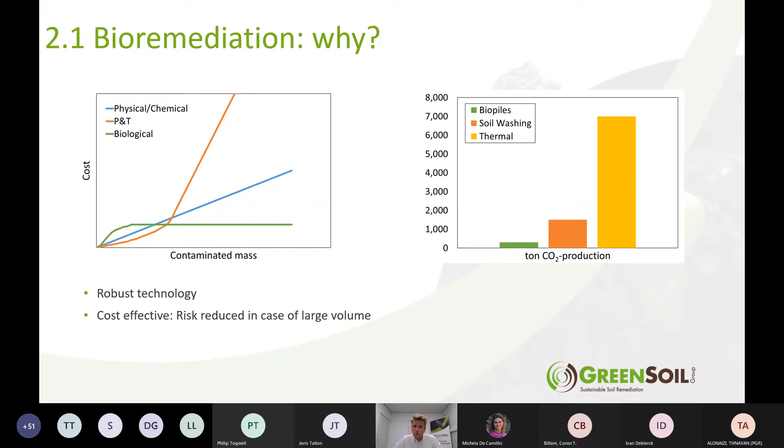Moving to the next slide, what is bioremediation? I think we have several ways of explaining this. If you look at the more chemical approach, we can have several pathways that we distinguish: aerobic degradation or anaerobic degradation. The way I try to explain it when people ask me what my job is, we are dealing with contaminants and stimulating the biological degradation, which can happen in two ways, aerobically or anaerobically.

When the aerobic pathway is taking place, microorganisms break down the contaminants, respiring oxygen just as we do, producing carbon dioxide, energy, and biomass. In the anaerobic pathway, it's the other way around: those organisms are not breathing oxygen, but breathing the contaminants. The electron acceptor is the contaminant, and the electron donor is the organic substrate we usually inject, such as molasses, lactate, or our own Dehalo GS. The products formed are ethene, ethane, carbon dioxide, energy, and biomass. This biomass is quite important, because the more biomass we generate, the more microorganisms we form, and the more we accelerate the biodegradation process.

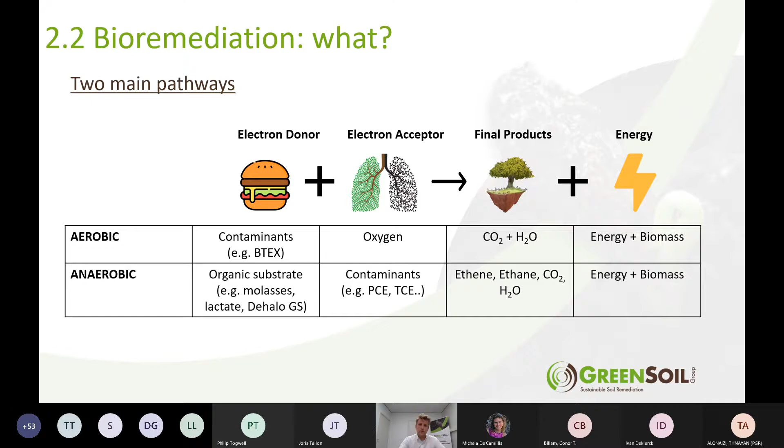So the focus on this biomass is quite important. If we look at aerobic bioremediation, we are usually looking at compounds such as hydrocarbons, mineral oils, low chlorinated compounds, alcohol, ethers, and so on.

These products often have a density lower than 1 and have the tendency to float above the groundwater table, forming L-NAPLs. With changes in the groundwater table, you get a typical smear zone—a layer surrounding the groundwater, due to natural fluctuations of the groundwater table, where you have a dense contaminated mass present.

As a rule of thumb for the degradation process, as we said earlier, you need the biomass, and you need oxygen as well as nutrients, which are required for forming the biomass. But often oxygen is a limiting factor here. We use the rule of thumb that we require about 2 grams of oxygen for each gram of oil that needs to be broken down. That also provides some rules of thumb on how to assess how much oxygen one would need to biodegrade a certain contaminant.

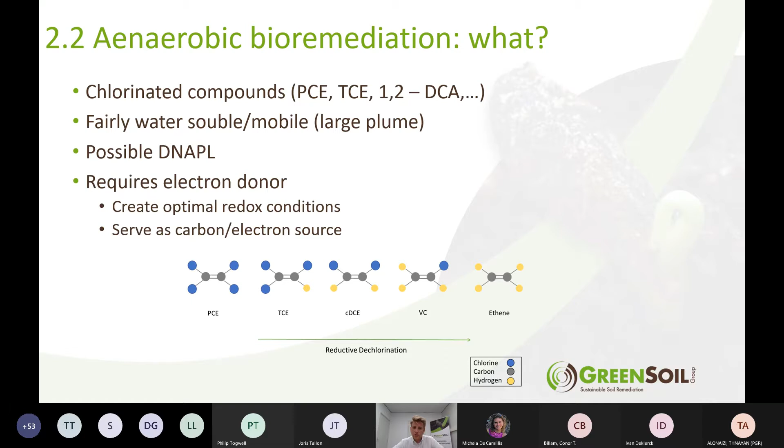To make sure that the degradation of these parameters can take place, we need to create the optimal redox conditions, and one needs to dose the electron donor, which serves as a carbon and electron source. One of the most typical and most known pathways, the reductive dechlorination, is presented in this simple graph below, where you see the elimination of one chlorine atom at each step.

However, in reality, bioremediation is much more complex than we often consider. We usually have different processes taking place at the same time due to heterogeneity. These heterogeneities can be related to conditions, for instance different soil layers, but also heterogeneity related to the contamination. Often we don't know for sure what is really going on—we usually observe some concentrations of contaminant mass, also the daughter products, also some of the other geochemical conditions, and in most cases there will be a combination of biological and non-biological processes taking place.

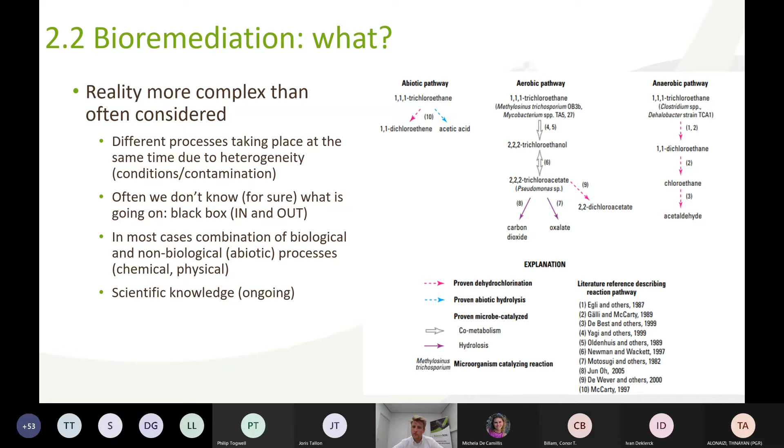Then you have an aerobic pathway where you can have just regular degradation, could also be a co-metabolic degradation, and then you could have an anaerobic pathway. In reality, all these different pathways are taking place by different microorganisms under different geochemical conditions. What you really want to do is see which pathway to stimulate, which is the most effective, which will have the fastest results, the fastest degradation, and try to create the optimal conditions for this pathway. That's more or less where the science kicks in, and how we try to see what the possibilities are and how we do this.

I call it here the GreenSoil approach, but I think everybody looking at bioremediation more or less has the same approach. The first phase I like to call the assessment. In the first line of evidence, we try to see whether we are already observing some degradation. A quite easy example is contamination with perchloroethylene. If you know this is the mother product, you take samples and observe whether we already have presence of trichloroethylene, dichloroethylene, vinyl chloride, ethene, and so on. If that's the case, then you know degradation is going on. How can we accelerate this? How can we stimulate this? And how can we make sure we achieve the target results?

If we are not observing this degradation, it could have several reasons. The most often second line of evidence involves verifying the possibilities by checking the geochemical boundary conditions. These are also quite well known: checking pH, checking redox, checking the presence of oxygen, nitrate, sulfate concentrations, TOC, DOC. These are all typical parameters which can point you in the right direction as to why degradation may not yet be taking place.

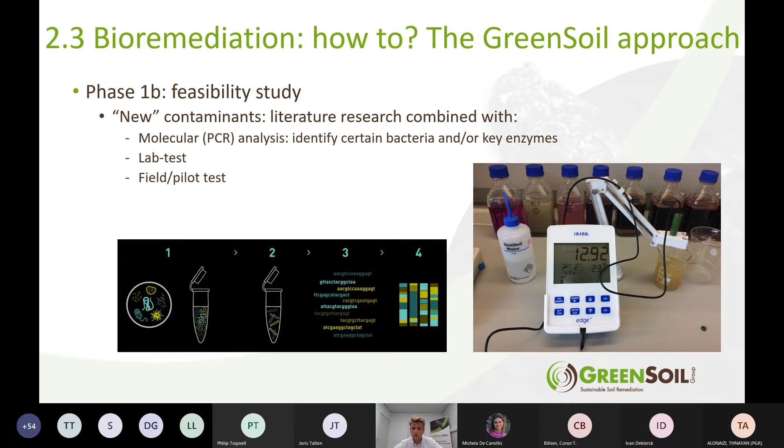Once phase 1 is completed and we expect biodegradation is a possibility, we move to the design phase of the project. One thing we cannot stress enough is that a thorough understanding of the conceptual site model is key. It's key when you're investigating or delineating contamination, when identifying risks related to contamination, but it's also key when designing a remediation system. So you need a thorough understanding of the contamination, the geology, the hydrogeology, and the geochemical boundary conditions, as I explained earlier on.

You also need to know what are the boundary conditions which are being imposed by the redevelopment, by the stakeholders, and timing-wise. Then based on this information, you are able to select a remediation technique, or in case of remediation combined with redevelopment, often a combination of techniques. Once you have selected your technique, you will be filling it out and going into a detailed design.

Things that we often see is, for instance, a combination of an excavation of source areas together with an in situ approach, or for instance, a combination of pump and treat and soil vapor extraction for smear zones, followed by an in situ approach.

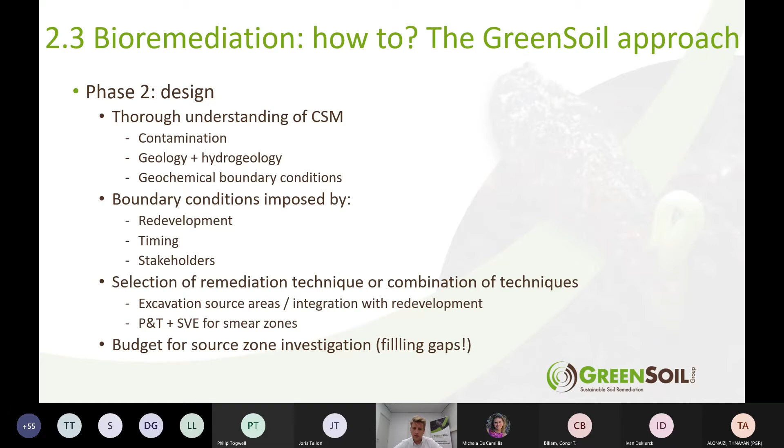I want to take this moment to explain some more common remediation or bioremediation techniques and how we implement them in practice here within GreenSoil. Of course, we implement many more techniques, but I think the following three are the most common ones.

The first one is aerobic biopiling, which can be considered an alternative to the typical soil treatment centers. In this case, we are treating the soil on location. We excavate it and create the optimal conditions for aerobic biodegradation within these biopiles.

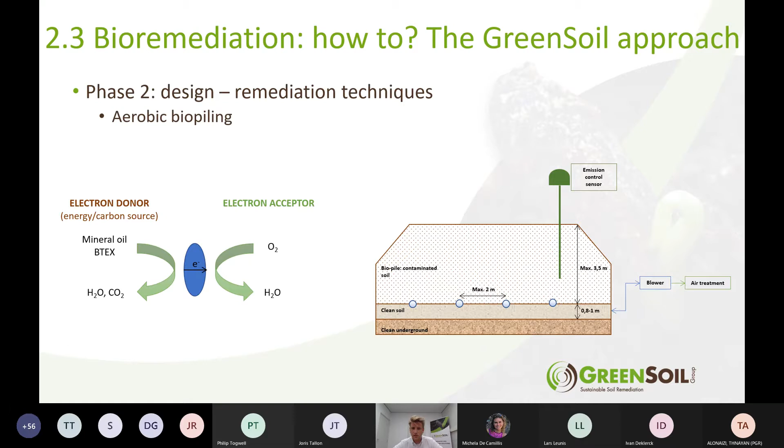The thing is, we are extracting air throughout the biopile. So we are not blowing air through it, we are sucking out air through the biopile, and as such forcing oxygen to enter the biopile. Of course, the contaminated air which is exfiltrated out of the biopile is treated before being discharged.

More or less the same processes can take place in situ, and that's what we call in situ enhanced aerobic bioremediation. In this case, we are treating the groundwater. We inject air and recirculate contaminated water, extracting it on one hand, adding air and nutrients, infiltrating it on the other side, and as such treating the water above ground in the bioreactor, but also creating a large bioreactor in situ. So it's the same processes as the aerobic biopiling, but instead of excavating the soil, in this case we are treating the groundwater in situ.

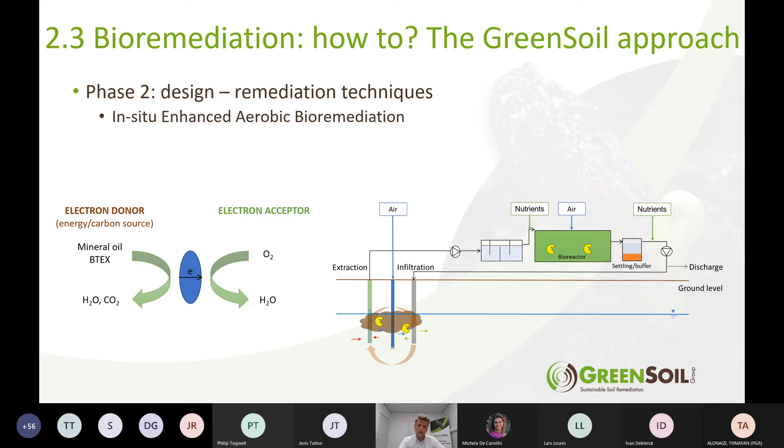The final typical GreenSoil remediation technique is the in situ enhanced anaerobic bioremediation. In this case, we are also opting for recirculation, so we extract and infiltrate water to flush the contaminated volume in the aquifer. But we are not dosing oxygen in this case, instead we are dosing the electron donor.

As an electron donor, we have developed our in-house Dehalo-GS carbon source. It's a carbon and nutrient source which enhances biodegradation. It could be dosed by direct push injection, but we like to use groundwater recirculation because of the forced flushing of the aquifer. I think this is a technique that most people present in this webinar are quite familiar with, but it's one where we really have good results. One of the benefits of Dehalo-GS, also explained in previous webinars, is that you won't observe the typical pH drop due to the nature of the product we've developed.

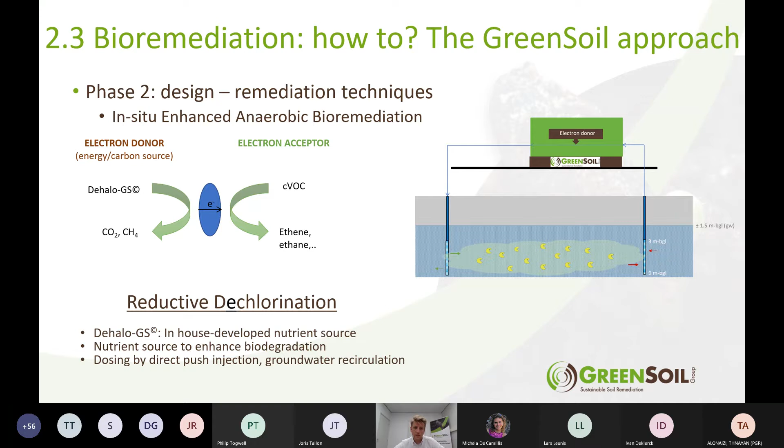The phase 2 design builds further on how we design a remediation system once we have selected the preferred technique.

The hydrogeological data is often the basis for our design. The most important factors here are hydraulic conductivity, soil type, particle size, and either literature data or results from field tests such as slug tests or pumping tests, or our own hands-on experience. We have been doing projects all over the world, but especially in the Netherlands and Flanders, in almost each type of common aquifer, so we more or less know what is possible within each aquifer.

What do I mean by the basis for our design? Based on these parameters, if we know, for instance, the hydraulic conductivity, we can do some basic calculations for determining the number of filters required. Based on a certain hydraulic conductivity, we can know the radius of influence. For instance, a radius of influence of 5 meters in a sandy aquifer is quite common. If we know this radius of influence and the area we need to treat, we can determine the amount of filters needed to treat the full contaminated aquifer.

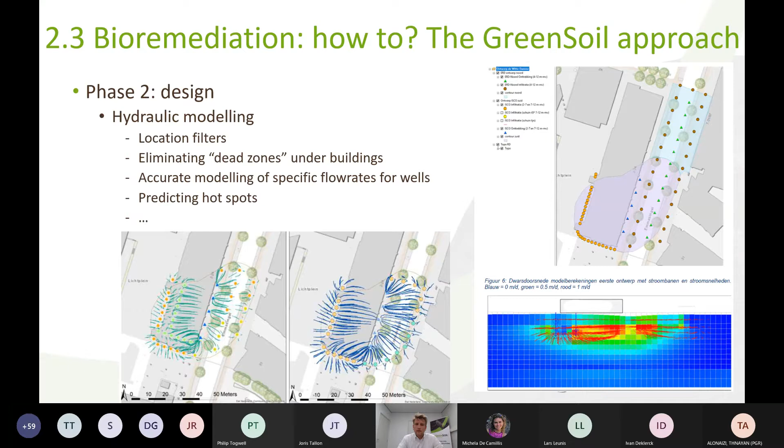Moving on, it's something inherent with remediations, but typically with in situ remediation, and I think even more so with remediations combined with redevelopment, it's dealing with uncertainties. So how do we deal with these uncertainties? One key rule of thumb within GreenSoil is that we always try to rely on a cyclic design process. As I said earlier, the consultant often isn't able to do as much investigation of the source area as they would like. When we are installing our in situ system, it's often the biggest fieldwork campaign we get during the remediation process or the full contamination project.

So we really rely on all the data we get during this installation phase, and we use all this data to fine-tune our design. Furthermore, within the design, we try to maximize flexibility.

In a typical recirculation system, whenever we can, we try to make sure that we can use each filter for both extraction and infiltration. We design the installation or the unit such that we can switch around and use each well as we would please.

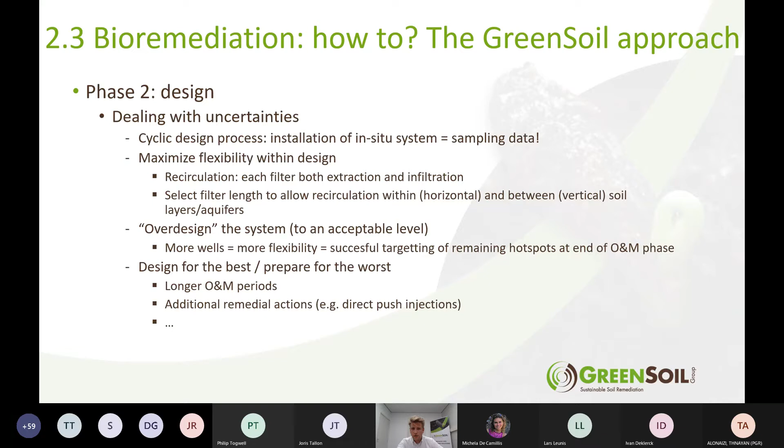Implementation phase: integrating bioremediation and redevelopment. Just as during the investigation phase and during each big project, timing and communication is key. This cannot be stressed enough, but it will often mean the difference between failure and success of a project. Communicating with the client and all the stakeholders is really important, and being transparent in what you're doing...

Why we opt for these treatment trains is, although they are often not the most financially feasible, they do allow us to eliminate uncertainties and focus on eliminating the bulk of the contamination. When you're able to remove a certain bulk of contamination within a short time frame, this may have an impact on the budget...

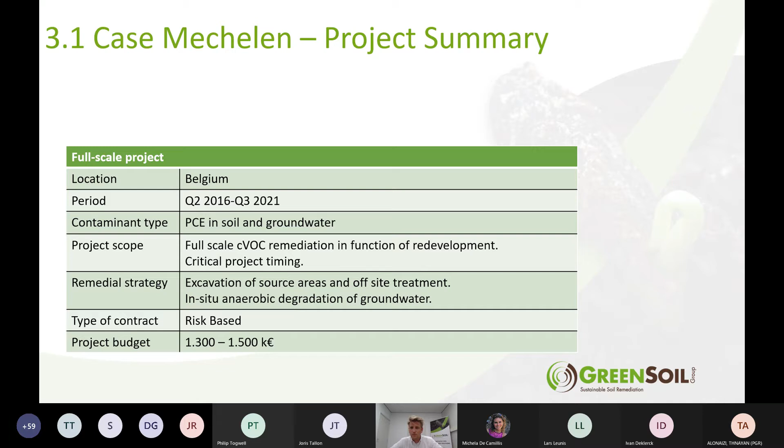Okay, that's it for the theory. I hope it was useful for some of you. It has been a bit back to basics, but I did try to include some rules of thumb. Now I want to move to the two projects. As I said earlier, these projects have been presented in the past as well, so I'll try to keep it short, because we're already quite a long way into the presentation. Should you require additional background on these projects, please get in touch or visit our other webinars.

The first project is in Mechelen, where we have been doing the remediation of a former metal treatment company. They had been active until 2012. Soil and groundwater was impacted with chlorinated solvents down to 16 meters. Quite a large contamination, where a hydraulic barrier had been operating for almost 12 years.

This resulted in minimal mass removal, and there was really no source identified. So it was a typical CVOC contamination, where we had a good idea of the plume of contamination, but where the source was not really clear.

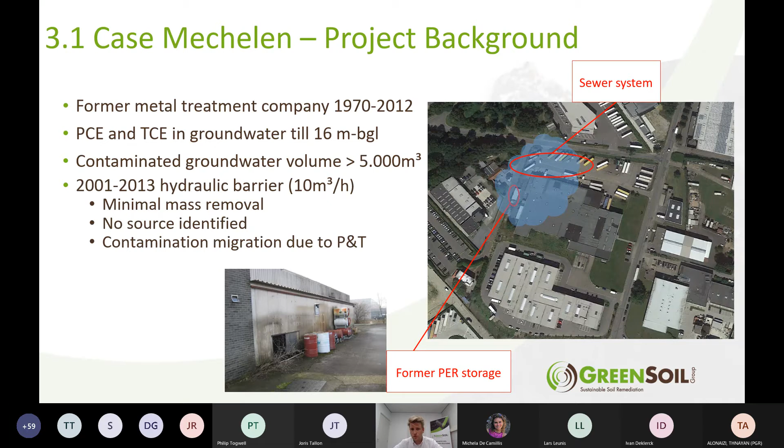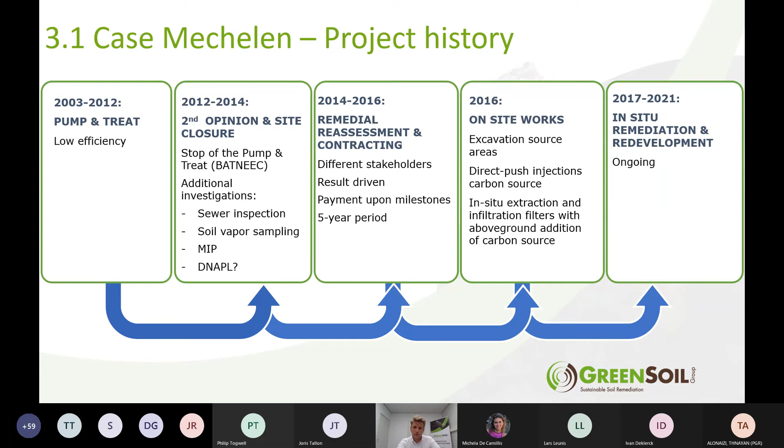Quite some project history, as I said, a pump and treat, followed by closure of the site, new remedial assessment, and then we came into the picture around 2016, where we were able to provide the client with a result-driven contract. So a risk-based contract where we are being paid when we receive certain milestones. We started the remediation in 2017, and we are moving towards the end of the project, as being shown by the results in the next slide.

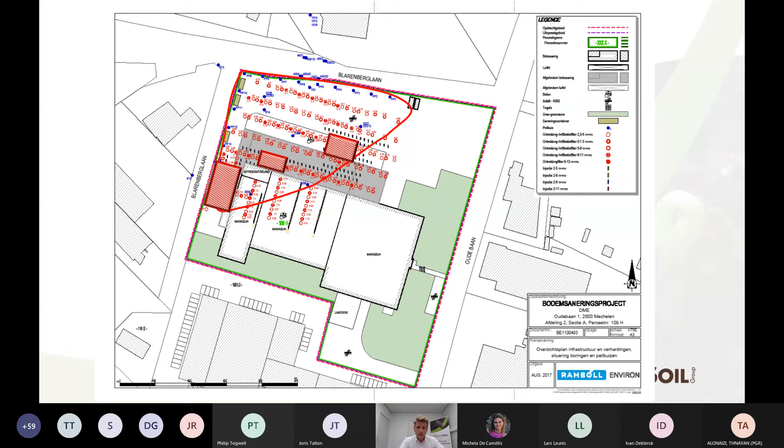After some additional investigation, we were also able to identify the source areas, and here are some pictures of the different techniques that we implemented here.

The source areas, they were excavated. Then we installed quite a dense recirculation system, as was shown in the previous slide. And in between the different filters, or the recirculation filters, we have been dosing additional carbon source through direct push. These direct push injections are just there to speed up the flushing of the aquifer, so these are not required. We would achieve the set out results as well by just using the recirculation, but by dosing additional carbon source in between the different filters, you're effectively shortening the time frame required for the full flushing of the aquifer.

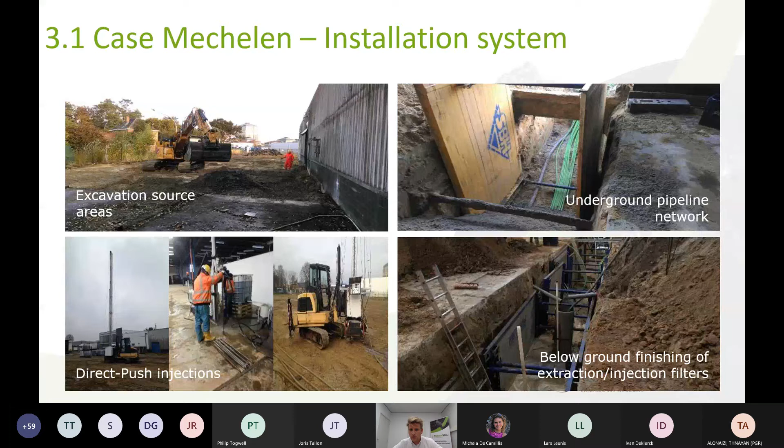As you can see in the pictures, we also installed all the piping underground, and all the filters have been finished below ground at a depth about 1.5 meters below ground level.

This is the site, some more pictures during the O&M of the works. And then here you'll see a schematic of the typical recirculation. So in the next animation, you will see groundwater being extracted from the extraction well, being pushed through the remediation system, carbon source being added, and then once again being infiltrated in the infiltration well. It's being shown in this schematic, just to show how simple this system really is.

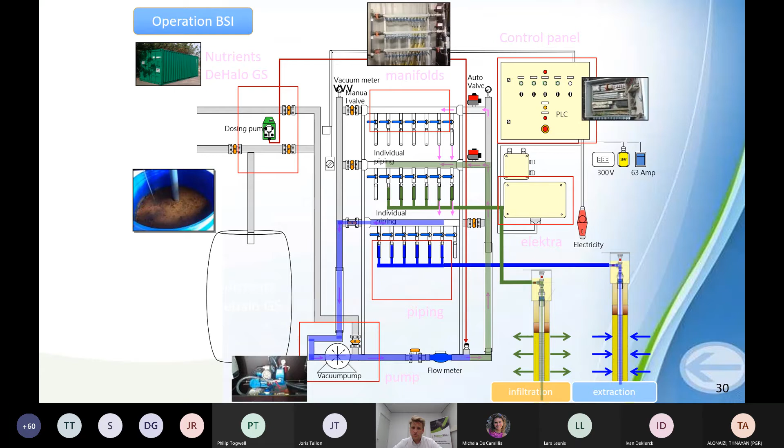It's not really complex. The complexity lies in making sure that you are able to treat the whole aquifer, and making sure that when you're operating such a unit during several years, that your maintenance is on point, that you're not clogging filters, you're not losing money by reinstalling new wells, things like that. So that's where the expertise lies.

Then some results. So this was, as I indicated earlier, the contour of the perchloroethylene and trichloroethylene at the start of our project. And you'll see that during the years, these concentrations diminished.

And this is also where the flexibility of our system comes into play. Once these areas are no longer above our target values, we are able to stop treating certain times or shutting down certain parts of our remediation system and focus on the remaining hotspots, and more intensely flush, for instance, those locations. So I think allowing the flexibility, and taking into account this flexibility during the design phase, is really important.

As you can see, in the past two years, we did not have any exceedances anymore of our target values of our mother product.

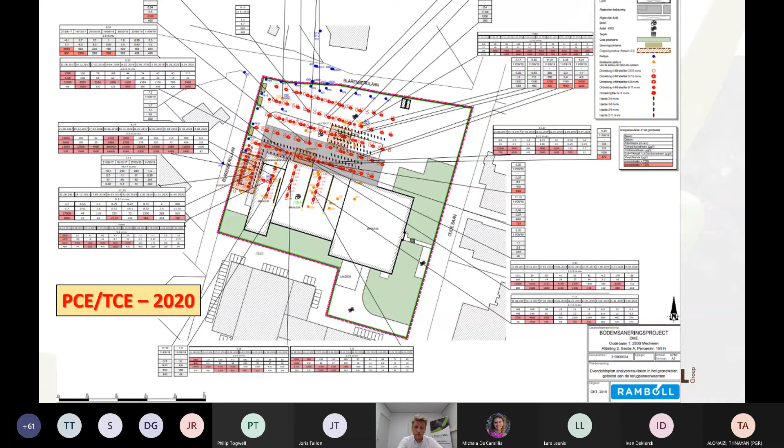As we explained earlier, the degradation pathways start from the mother product and result in the formation of dichloroethylene and vinyl chloride, the daughter products. Also here you will see a shrinking, but it's slower, or it follows after the degradation of the mother product. You'll see some contours, and you'll see the remaining hotspots that need to be treated in these final steps.

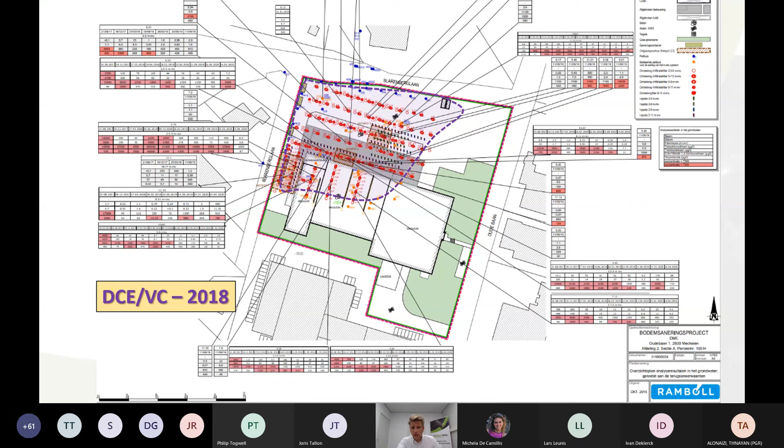Of course, we are not only monitoring on our infiltration and recirculation filters, which are the basis for these contours, where we are able to sample water coming in and going into each well in our remediation unit. But we are also, of course, sampling the monitoring wells in between these recirculation wells, and those are the results that you're seeing in these graphs.

Once again, you'll see the clear degradation of the mother product, the tetrachloroethene, the blue one in the graphs, and slowly forming these degradation products such as dichloroethene and vinyl chloride. And the graphs still show that we do have some work, but things are moving along quite nicely.

And yeah, the redevelopment of the site is already ongoing. We are still remediating, still active on location. As you can see, this building has been installed on top of our remediation system, and we were able to really successfully integrate a redevelopment within a remediation.

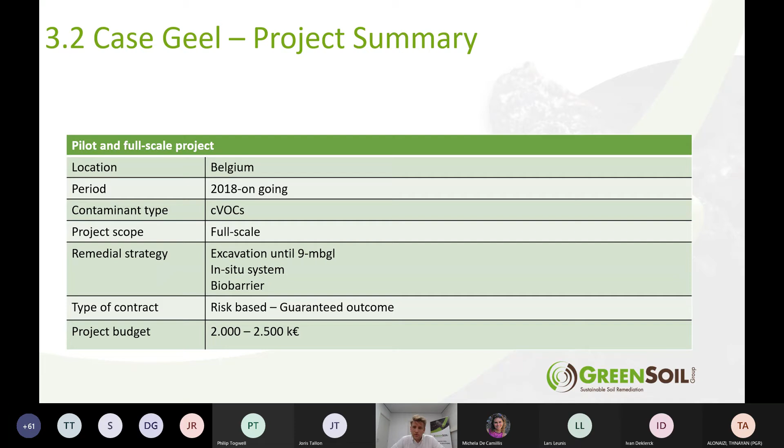Moving on to the second project, the project in Geel, also another one which we are quite proud of and which we have presented in the past, so maybe quite familiar to some of you.

The former telecommunications site, where we have once again a contamination with CVOCs. During the investigation phase, we had limited degradation products. Contamination was present until depths of 21 meters, and we identified 2 source zones and the typical long contaminant plume, which shows the typical CVOC spreading.

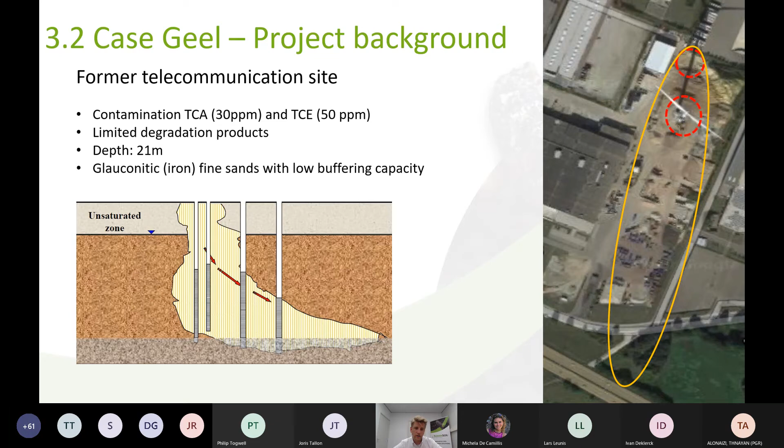So moving down gradient of these 2 source areas in the more permeable layers. Important to know here is that one of the challenges of this project were the glauconite iron sands, which have a very low buffering capacity, and which was also one of the reasons why earlier bioremediations in the past were unsuccessful. So this project has a quite large history.

I'm trying to keep things short today, so I'm not going into too much detail here. But previous remediation activities on location were unsuccessful. The site owner and the liable party had conflicting interests, and it seemed that the project was at a standstill.

We were able to offer a fixed price solution, and we were able to transfer the remediation obligation from the liable party to GreenSoil. So for this project, we really had a typical contract where no longer the liable party would be liable for remediation, but this was being transferred to GreenSoil.

The remedial design also, once again, included the typical treatment train. So we had an excavation of the 2 source areas, then an intensified source recirculation, stimulating the anaerobic degradation within the two source areas. The first source area has 4 deep wells and 13 injection wells. The second source area has 6 extraction wells and 37 injection wells.

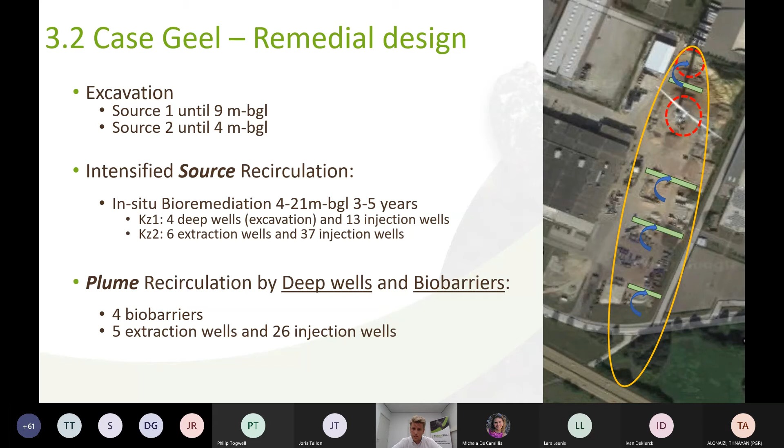Important to point out here is that we did not opt for the typical recirculation where each filter could be recirculating and infiltrating, but here we wanted to achieve higher flow rates, and that's why we opted for deep wells. For the plume approach, we opted for recirculation using biobarriers and deep wells in between the biobarriers to allow for a more sped up flushing of these plume areas as well.

We had quite some technical challenges. The site owner had the intention of installing a windmill on top of the source contamination. This was quite challenging, but it could also be a win-win. By combining the excavation and the construction, we were able to create a financially interesting result for all involved parties.

The other challenge was: okay, these windmills need quite some foundations. How do we make sure that our in situ system is still accessible?

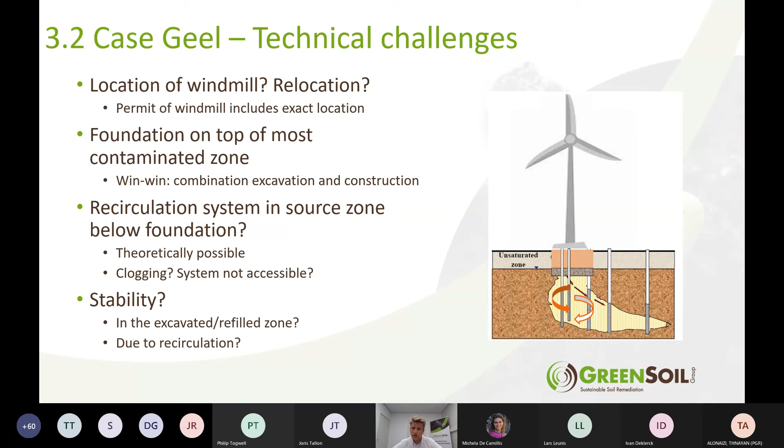This required quite some detailed engineering and design, but we were able to come up with a nice solution, and we were really able to integrate the redevelopment plans within the scheduled remediation.

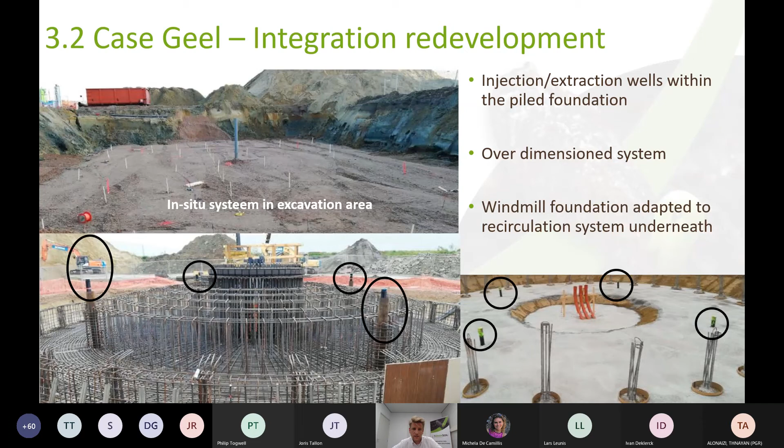So the above picture is a picture of the in situ system within the excavation area. The other one shows all the black circumferences, which are the different extraction wells pointing out of the foundation, the metal piling for the base of the windmill. It's quite a nice sight to see, and a nice piece of engineering.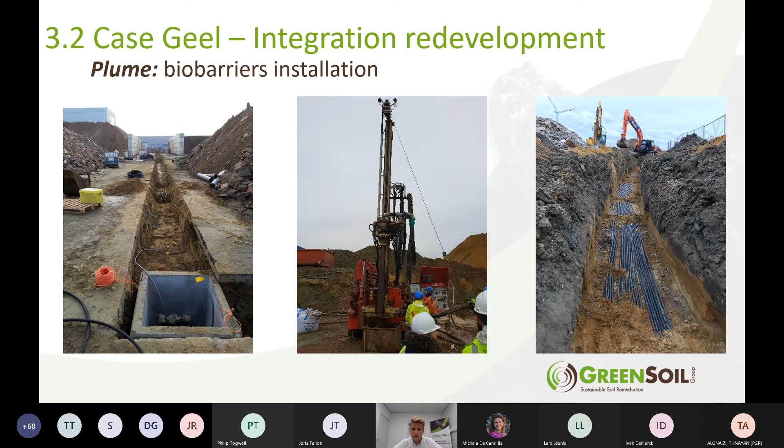Some pictures of the biobarriers, where we installed the biobarriers underground, just as in the Mechelen project. So all the piping has been installed underground, and then we also have a short movie clip of the presentation, which I will show now, where it summarizes our efforts on this location.

It starts off with an aerial view where we will see the two excavation pits. The first source zone has been excavated to 9 meters with an in situ system until 21 meters.

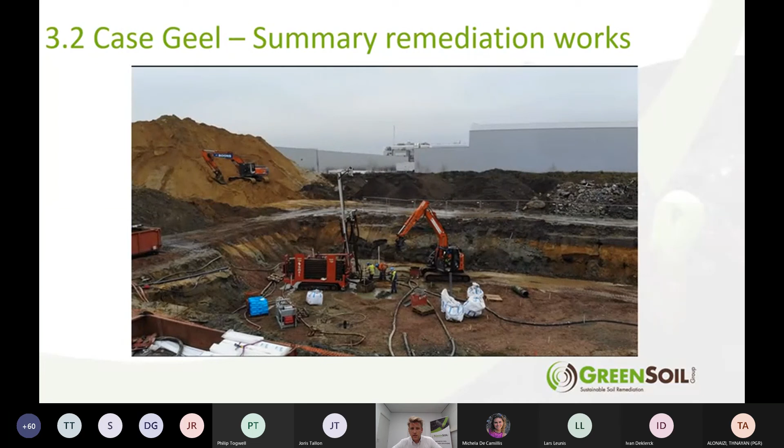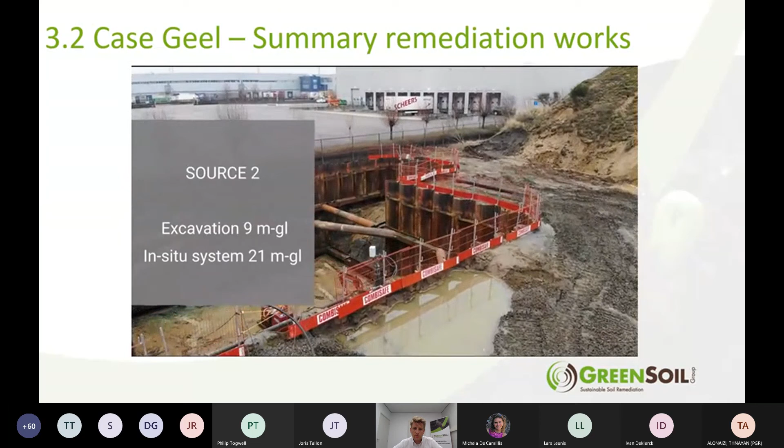To allow for this excavation, we did need quite some stringent stability measures and a large groundwater treatment system. We were able to treat flow rates up to 50 cubic meters an hour. You can see the second source area, excavated until 9 meters, and then an in situ system until 21 meters. As you can see, it's quite a challenging condition, and not so straightforward at all.

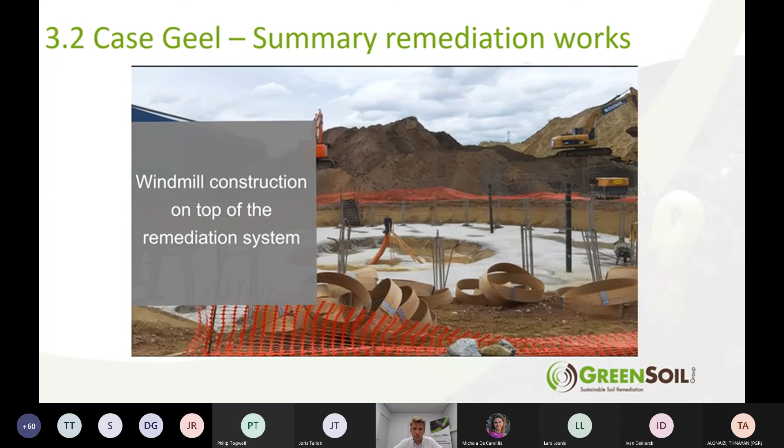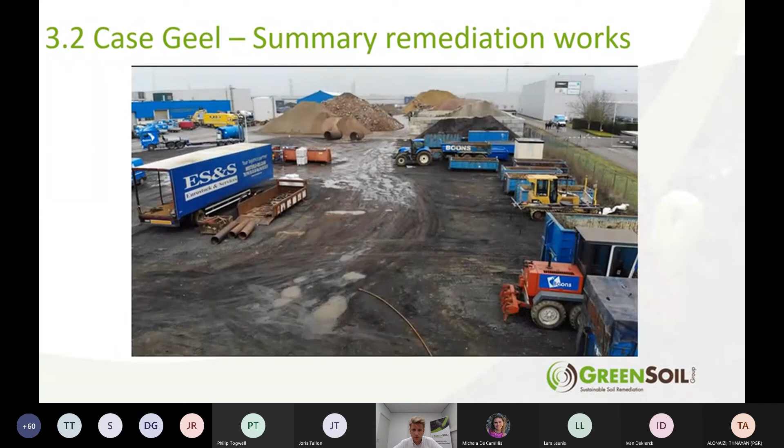The windmill construction on top of the remediation system. Some more pictures of the metal sheet piling. And then, to conclude, some photos of the biobarriers as well.

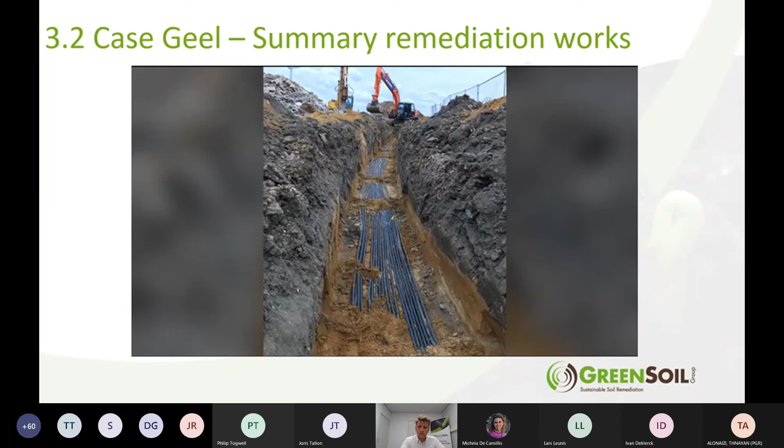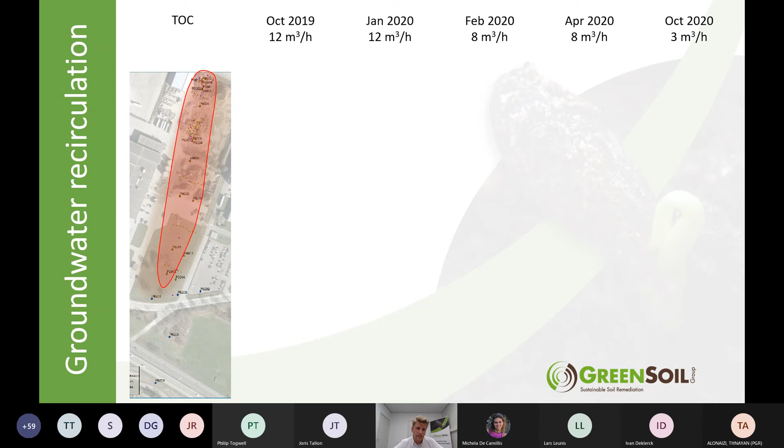To finalize and move to the end of this presentation, I want to show you some results. So the contaminant plume contour you're seeing now is the TCE plume, which has now been switched out for the measured TOC concentrations. As we said earlier, this allows flexibility within your system, which is more or less what's being showcased by the following graphs.

In the beginning, we opted to really recirculate within the source areas to make sure we were able to dose as much carbon source as possible within those two areas: recirculation at source zone 1, source zone 2, and at the first biobarrier. Afterwards we started playing a bit with this aquifer, where we decided, okay, we now see elevated TOC concentrations and first biodegradation signs within these source areas.

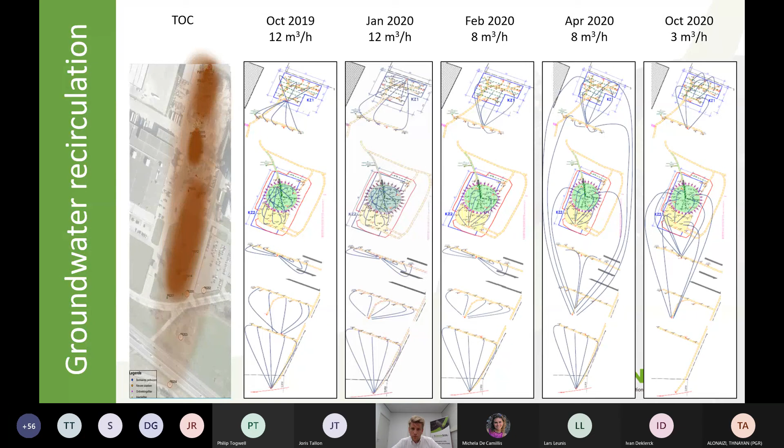This could be a good moment to also do some more extraction and more spreading of TOC within the plume and within the biobarriers. This is showcased by these flow lines, which are modeled in the hydraulic modeling software, and this is also reflected in the evolution of the TOC. At first these TOC concentrations are more localized to the first biobarrier and the two source areas, and afterwards you see it all spreading out, once we start being more flexible and able to flush this aquifer more.

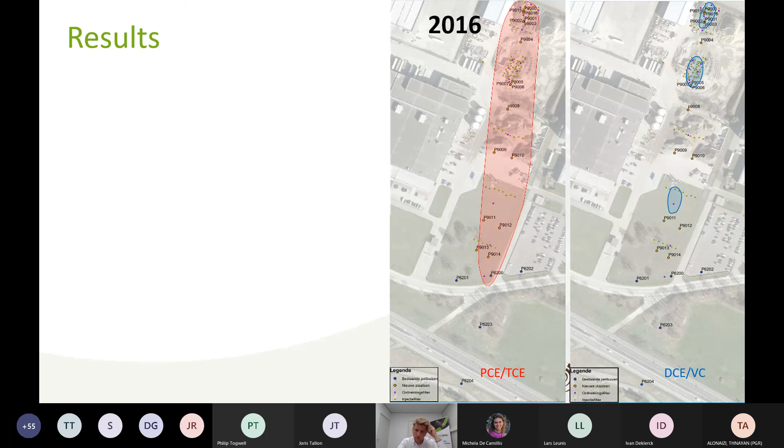Moving to the more traditional monitoring results in 2016, you'll see there's a large plume with PCE and TCE, and at certain spots the formation of these daughter products. Once we are busy with the remediation, you'll see that quite quickly these mother product plumes have been cut into pieces, and you'll see the increase of the formation of these daughter products. This is also showcased in the monitoring graphs of the monitoring filters, where you see the clear degradation of trichloroethene and tetrachloroethene to dichloroethene and vinyl chloride. The reason we were able to do this at this location, and why it did not succeed in the past, was the pH drop that's typical when dosing carbon sources.

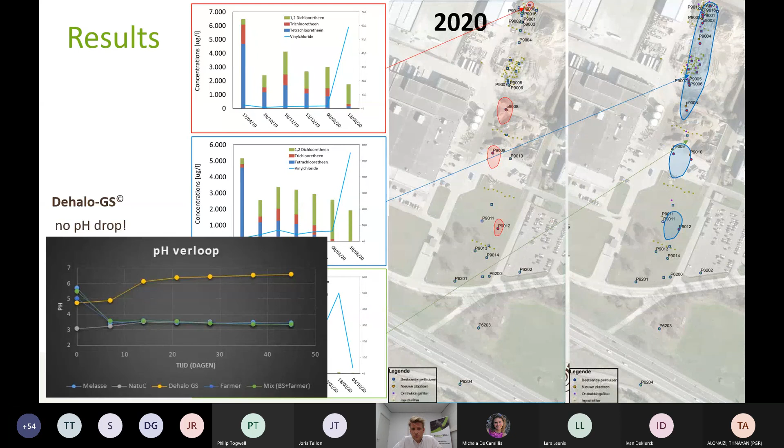We did not observe it at this location due to the properties of the aquifer—specifically this Glauconite aquifer is really sensitive to pH drop because it has almost no buffering capacity. That's one of the reasons biodegradation in the past was unsuccessful, and we were able to turn it around. And that concludes my presentation.